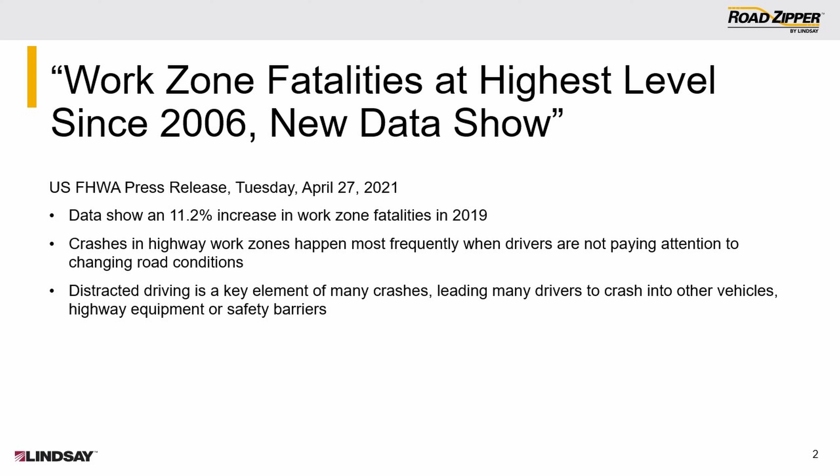Today, we'll talk about reimagining safety and mobility for interstate work zones. We'll focus on the significance, constraints and challenges of work zone safety, as well as partnerships that have generated safety and mobility solutions. Nationwide, there is an increased focus on work zone safety due to the recent data showing decreasing work zone safety. While many articles, reports, and presentations are focusing on driver behavior and reducing distracted driving, there are other solutions available to increase work zone safety for both motorists and workers.

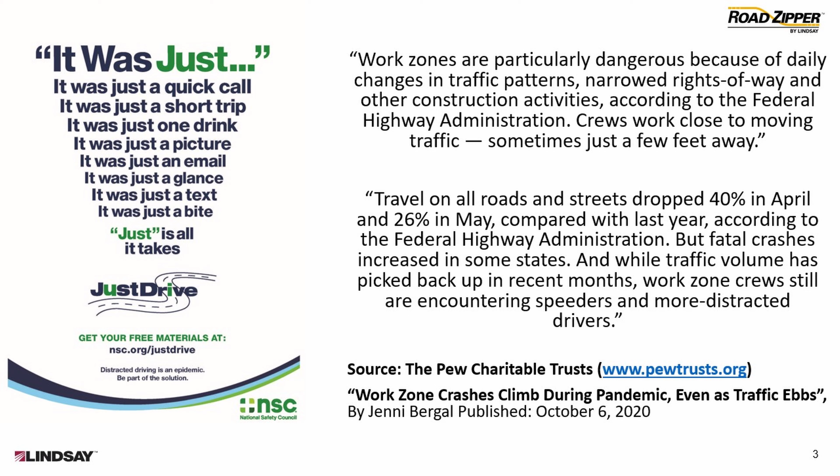The Pew Charitable Trust reported in October of 2020, quote, "Work zones are particularly dangerous because of daily changes in traffic patterns, narrowed right-of-way, and other construction activities, according to the Federal Highway Administration. Crews work close to moving traffic, sometimes just a few feet away," unquote. A recent study by the Associated General Contractors of America says that 9 out of 10 work zone accidents involve roadway users.

Behavioral safety campaigns about dangers of speeding and distracted driving in and around work zones improve public awareness, but do not prevent physical intrusion in the work zones. It is debatable how driver distraction affects roadway safety in a world with increasing wearable and mobile technologies and significant advances in connected and autonomous vehicles. It is best to find preventative solutions to provide safety against vehicle malfunctions or driver-related factors.

Positive protection alternatives include full closure with detour, static lane closure for short duration which impacts traffic mobility, and flexible lane or shoulder closure using movable or mobile barriers. In addition, automated traffic control options exist to avoid increased exposure of workers during setting up and removing of traffic control. MUTCD's guidance on positive protection is helpful for deciding between alternatives.

In addition, an intrusion prevention task force is set up consisting of representatives from the American Road and Transportation Builders Association, the Associated General Contractors of America, the National Asphalt Pavement Association, leading national contractors, organized labor, and others. The coalition is tasked to provide information, best practices, improved legislation, and the ability for state DOTs to include enhanced safety measures on certain roadway construction projects.

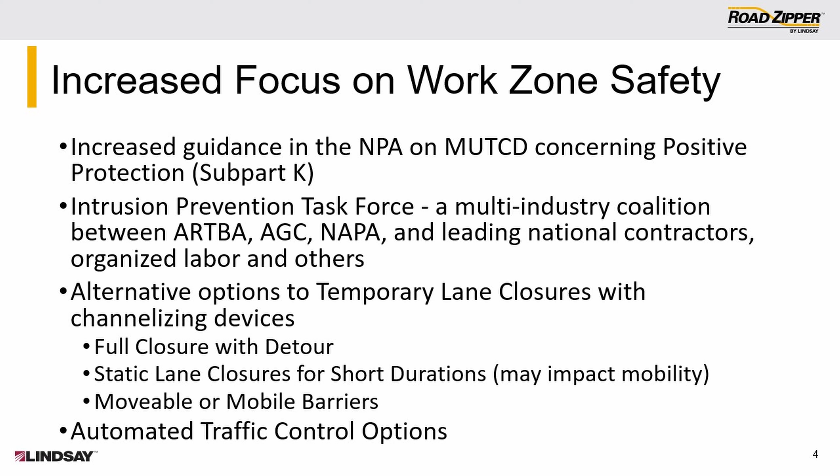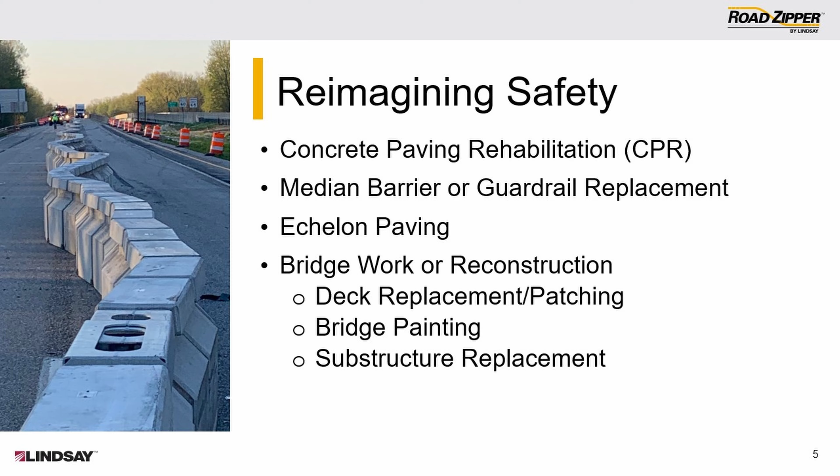Many DOTs are working to increase safety on projects where there is increased worker exposure, high ADT, a high percentage of truck traffic, and potentially night or off-peak work time frames. This photo is an example of how vehicle malfunctions can impact work zones. This was a concrete paving rehabilitation or patching project, which is often performed behind channelizing devices. This Indiana project used a movable barrier system to increase safety, which was a tremendous benefit when a semi-truck sheared off the right side wheels, causing multiple barrier impacts into the movable barrier. Without positive barrier separation, this could have resulted in worker injuries or fatalities.

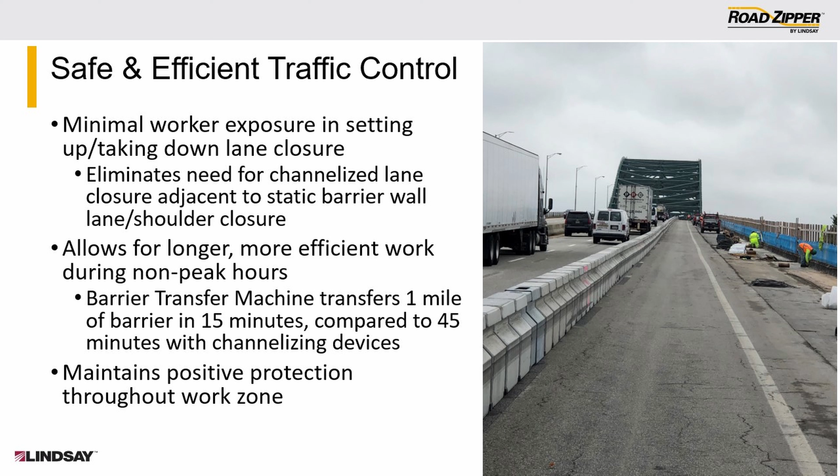The Piscataqua River Bridge in Maine is another example of work that might have been traditionally completed behind channelizing devices. The DOT wanted to decrease worker exposure in setting up and removing the lane closure, as well as separating the workers and motorists when work was taking place. Barrier was required as the bridge railing was removed during the project. Without flexible positive protection, the static barrier would be positioned on the shoulder with a non-peak channelizing device lane closure. Such workspace would have been constrained and non-productive with safety concerns due to the lack of an escape route in the channelized lane closure.

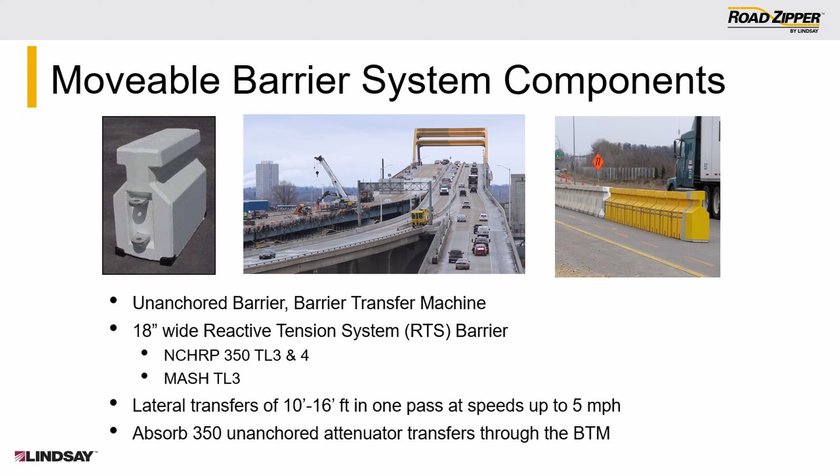The Road Zipper movable barrier system consists of unanchored 18 inches wide, 1 meter long, 32 inches tall barriers. The barriers are tested and meet the requirements of NCHRP 350 Test Level 3 and Test Level 4 and MASH Test Level 3. The barrier transfer machine transfers the barrier 10 to 16 feet in one pass at speeds up to 5 miles per hour. An Absorb 350 crash cushion is installed on the end of the barrier wall and is transferred through the machine with the barrier, eliminating an unprotected barrier end.

A static lane closure would not work for this corridor due to the high ADT and high percentage of truck traffic. This was evident as on the first night that movable barrier was deployed, the lane closure was not removed until 5 a.m. due to striping work. Between 4:30 and 5 a.m., a 4-mile queue built due to only having 2 lanes open. In subsequent days, the lane closure was opened and closed on time, providing the normal 3-lane travel pattern.

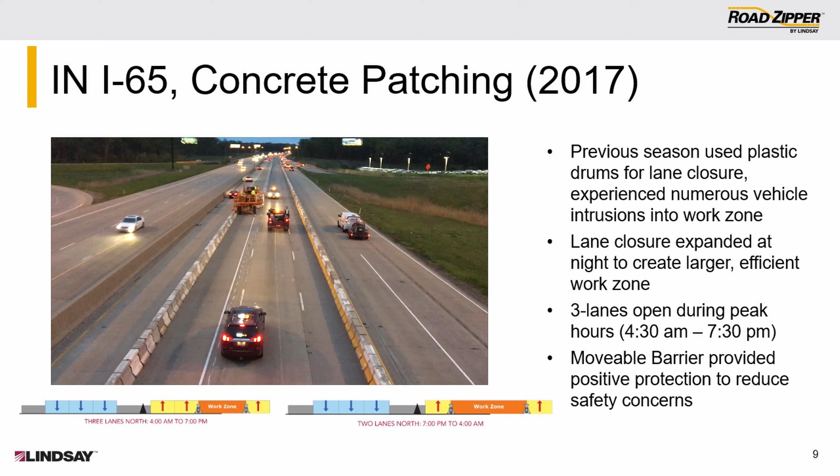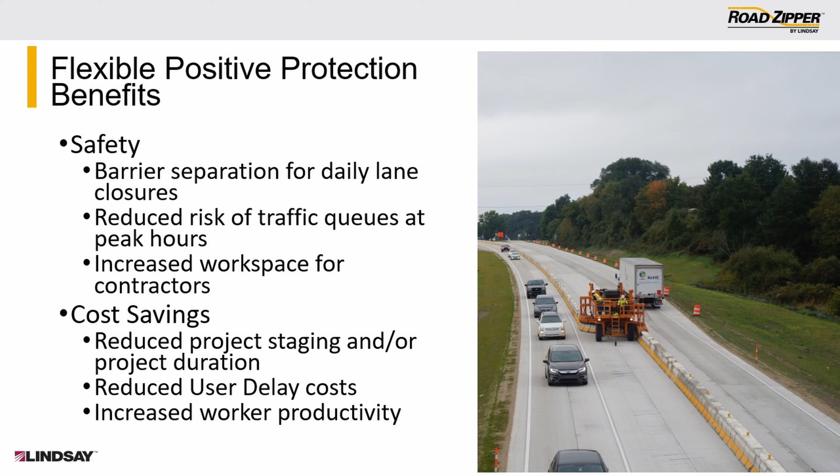Flexible positive protection provides additional safety compared to channelizing device lane closures, while still allowing a non-peak nightly lane closure. Additional benefits include reduced risk of traffic queues during peak travel times compared to a static barrier lane closure, and potentially providing increased workspace when needed for contractors. Flexible barriers provide maintenance of traffic options for accelerated construction projects, reducing project staging and duration, as well as helping reduce user delay costs.

Indiana DOT has worked to increase work zone safety over the past 4 to 5 years. They have an innovative approach to maintenance of traffic that allows them to close an interstate in one direction for a 30-day time frame. If the work cannot be completed in a short full closure, then the DOT considers a static or movable barrier scenario. Barrier is used on projects with high worker exposure on corridors with high ADT and typically where there is nighttime work. For this project, the contractor used 2 short runs of barrier for their concrete patching project. This allowed them to move the barrier throughout the work zone as their patching progressed.

During this project, they had a semi-truck hit and damage 50 meters of barrier, which represented approximately 1/5 the work zone. Both the contractor and Indiana DOT expressed that had the project used channelizing devices, the outcome could have been multiple worker injuries or fatalities. With barrier present, there was no safety risk for the workers on site.

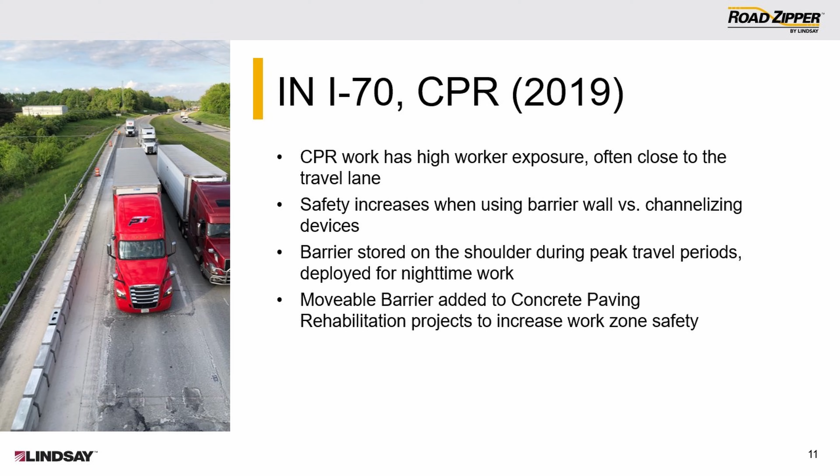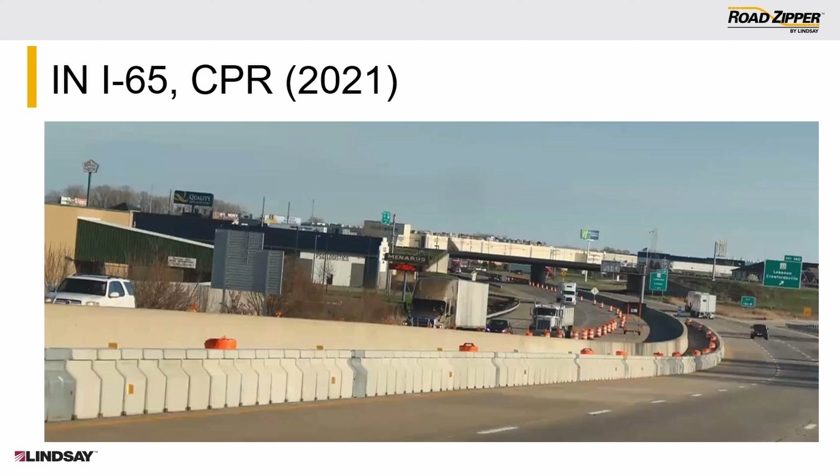Since 2019, Indiana DOT has continued to use a flexible barrier for concrete patching projects. This year, there are 2 projects on I-65 using movable barrier. These projects are also being evaluated by Purdue University to explore the impact of traffic queues on safety and mobility. By using a flexible barrier instead of a static barrier option, the queuing during peak travel times is reduced.

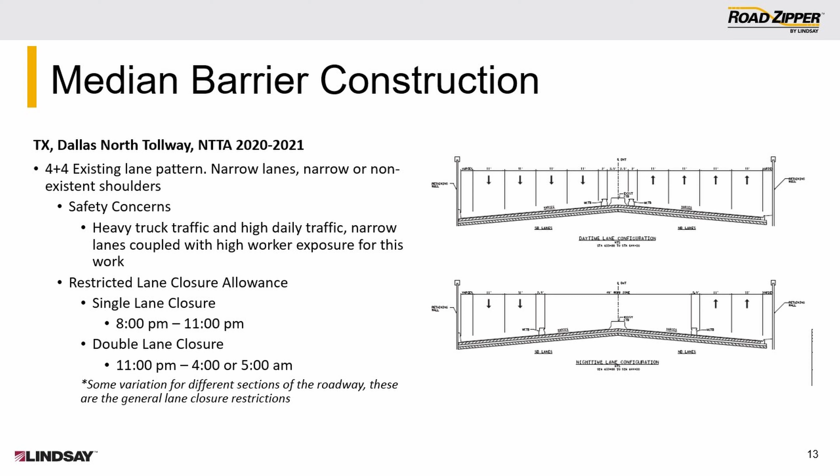During the peak daytime periods, the barrier is placed adjacent to the median barrier. Starting at 8 p.m., the barrier is moved to create a single or double lane closure. By 5 a.m., the barrier is returned to the shoulder to open all 4 lanes for the morning travelers.

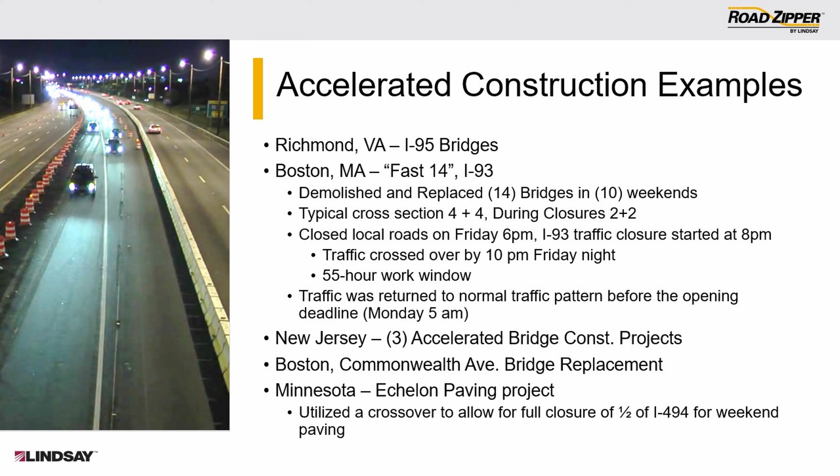Many projects use the road zipper for maintenance of traffic during accelerated construction. The Richmond, Virginia I-95 bridges, Boston, Massachusetts Fast 14, Boston Commonwealth Avenue, and 3 New Jersey projects all use the road zipper during accelerated bridge construction. The road zipper provided a positive barrier between bidirectional traffic, allowing for a full closure of the other bound. This gives contractors a large work area separated from traffic to complete their work in an accelerated time frame.

The Minnesota DOT wanted to utilize echelon paving on Highway 494 to provide a smooth paving surface. This required one bound of the highway to be closed for weekend paving operations. The local roadways could not support detouring of all the traffic from 494, so one lane of traffic was diverted to local roadways, while the other used a road zipper contraflow lane. This allowed the DOT to utilize echelon paving and maintain mobility for the corridor.

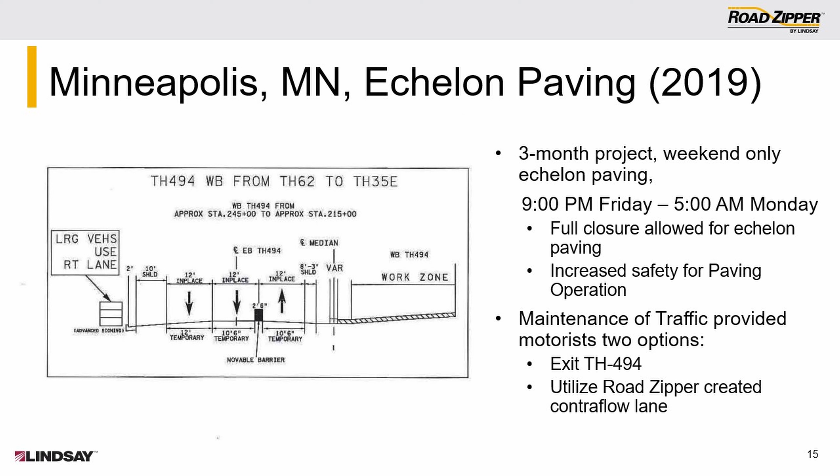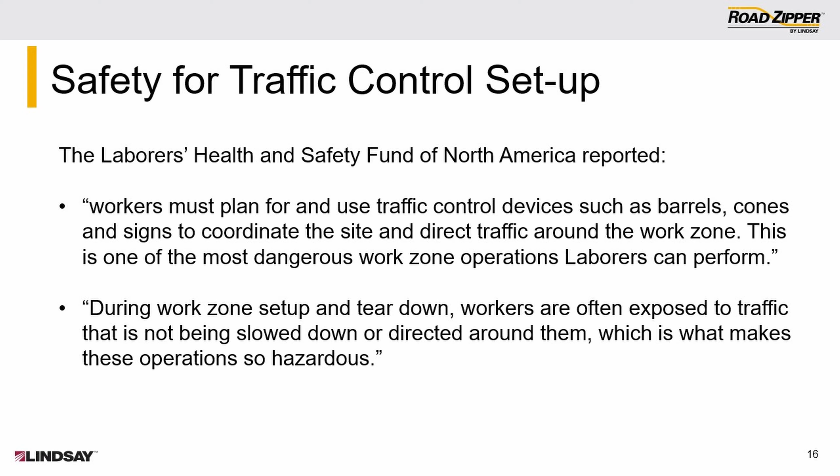Setting up and removing traffic control devices such as barrels, cones, and signs is one of the most hazardous operations for work zone workers. Automation technology exists that can reduce workers' exposure to moving traffic. Separation of workers from moving traffic is critical to ensure safety for workers and motorists. To reduce exposure, there are automated technologies available to help with channelizing the traffic. Highway geometrics can also affect the overall worker safety during traffic control deployment and removal due to limited sight distance and visibility concerns.

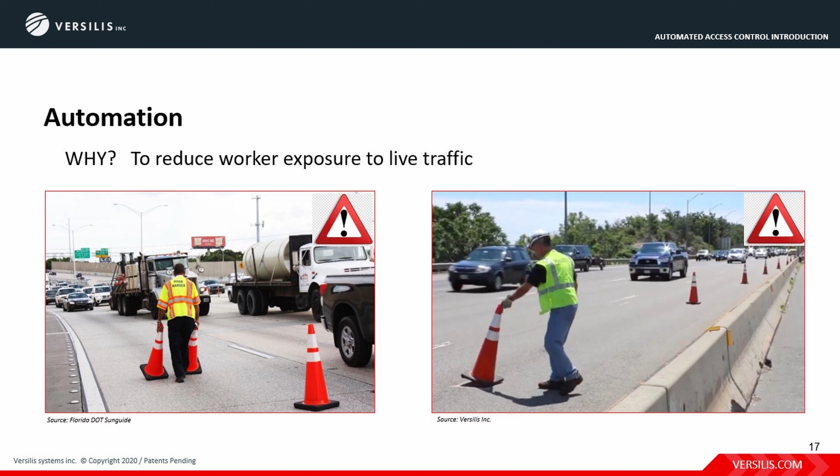Automated access control can be used for deploying and removing traffic control for work zone lane closures with no worker exposure, and within a fraction of time taken to set up channelizing devices for the same purpose. Automation technology helps with consistent signs and device spacing and remote operation and monitoring.